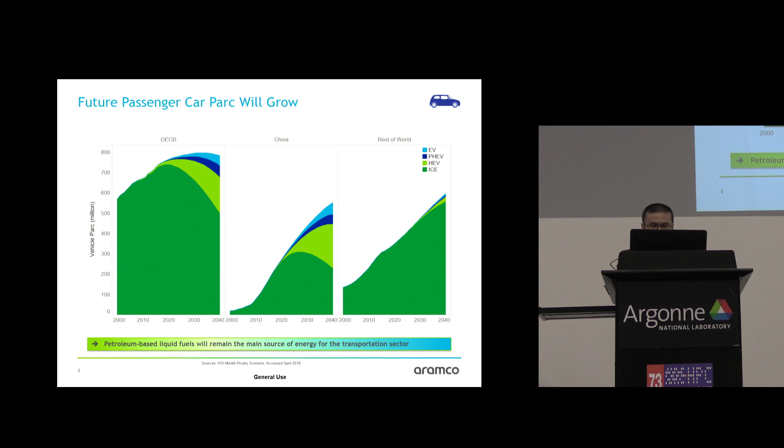Okay, then let's go to my presentation.

So this work has a lot of people, this is a truly team effort. A lot of people contributing to this work. I want to acknowledge a few people at our center, Aramco, and also our collaborator at Argonne National Lab, mainly from Sibendu Som's group: Pinaki Pal, Opeoluwa Owoyele, and Sibendu Som.

And also we have a collaborator from Friendship Systems. They mainly have a very capable software to help us properly manage the design space. We also have Dan Probst, Kelly Senecal, Eric Pomraning, Keith Richards from Convergent Science. They have a CFD software, commercial software, I'll give a little information on why we're using it. And also the Advanced Engineering System Integrity team from Cummins for their technical inputs.

So this talk is about using HPC. We use Mira extensively. Actually, now it's become a standard process in our daily job. We also acknowledge the IT department at Aramco Service Company for their technical support of the cluster.

So I want to spend a few slides to give you an idea of who Aramco is. We were the largest oil exporter and the 6th largest refiner in the world, with some recent purchases in the refinery industry. We also have a large reserve of natural gas, which is probably of some interest in the future.

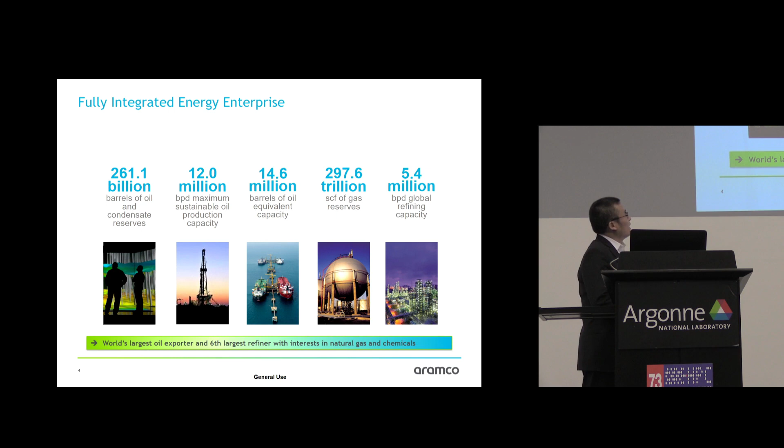So we have a lot of research activity, including upstream, downstream, and also strategic domain. I'm probably not going into too much detail on upstream. I mainly focus on where the Detroit Research Center is, which is in this strategic domain.

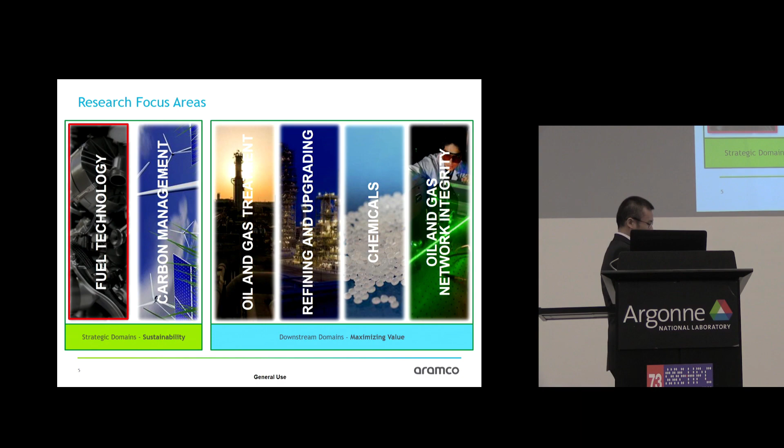Basically, we have a fuel technology division looking at how to use energy in a more sustainable way. The way we try to achieve our mission and goal is we work collaboratively with the relevant stakeholders. We have the headquarters at Dhahran, and we also have 3 research centers around the globe.

One in Detroit, one in Paris, and we also recently opened one in Beijing, and we also have one at KAUST. Then we work collaboratively with universities, national labs, policymakers, and OEMs especially, working closely with automotive OEMs to achieve the mission of how to use energy in a sustainable way.

So a little more information on our Detroit Center. We focus on 4 areas there: doing some strategic analysis of a future perspective of transportation, looking at advanced technology in the passenger transport sector, and also doing commercial transport research to look at co-optimization of fuel and engine to achieve optimum performance and lower emissions.

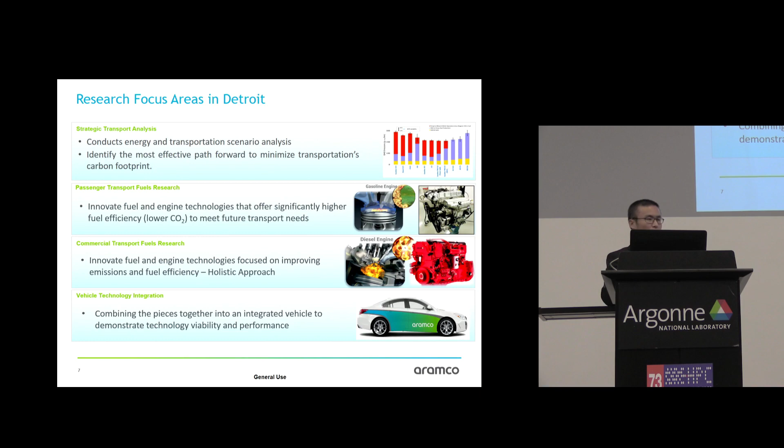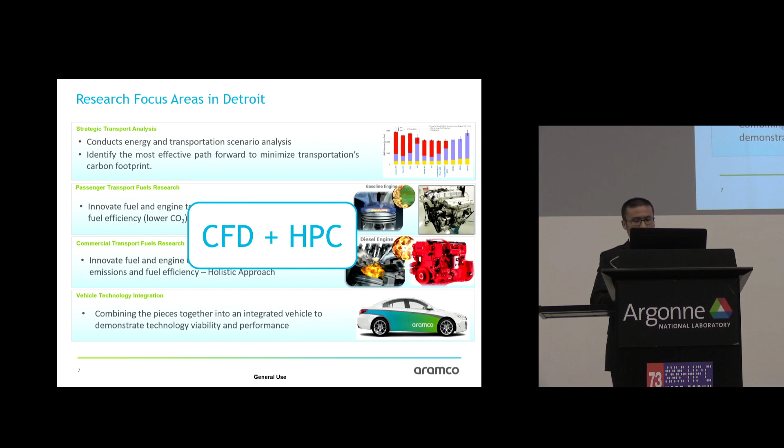And we also have this technology integration research there. The CFD and HPC mainly fall into the two in the middle. Our team is supporting passenger and commercial transport, looking for really advanced engine concepts that can achieve low greenhouse gas emissions and also low fuel consumption, achieving good fuel efficiency. That's basically our goal.

So our center is quite new. It was inaugurated at the end of 2015, still less than 4 years old. Very briefly, we have 5 state-of-the-art test cells to demonstrate the hardware and performance, and we also have a 4-wheel climate chassis dyno to put the technology in the engine to demonstrate the concept. We also have our own controller, which is really important, because control is a really important piece of this new engine concept. And we also have excellent computing capability there, especially working with the experts at Argonne.

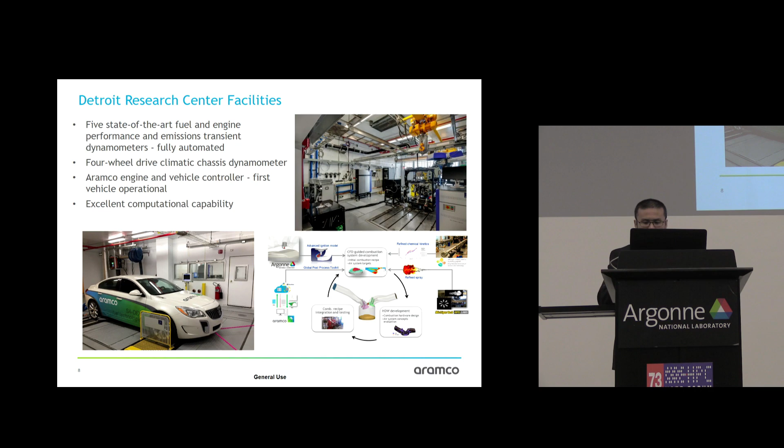So going to the project, I want to give you a little background on why we're working on this project. This is a project in the commercial transport area.

The reason we are working on this: this figure basically shows a fuel demand ratio in the next 30 years, a ratio of middle distillate, which you can consider diesel versus gasoline fuel. We can see by 2040, this fuel ratio might reach 1.7 from different projections. So this demand imbalance is likely to produce a price imbalance between these two fuels.

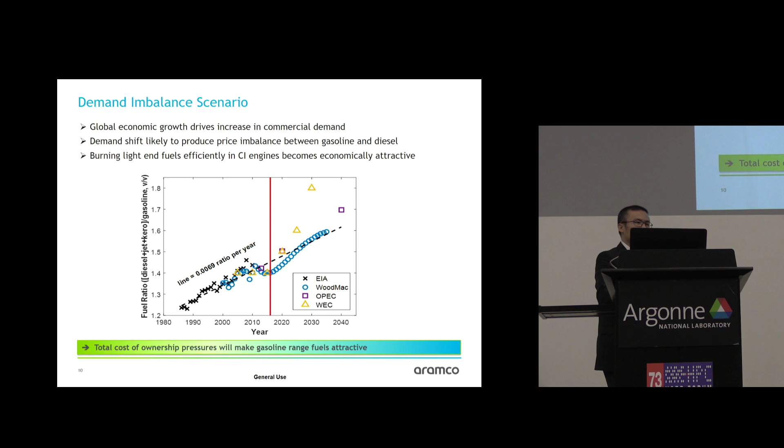So if gasoline becomes cheaper, how should we deal with it? Finding ways to burn this gasoline fuel in a CI engine, like a diesel compression ignition engine, becomes very economically attractive.

On the other hand, there's also a regulatory requirement, mainly from the emission side, the criteria pollutant side. CARB, the California Air Resources Board, is the world leader in making emission regulations, and the rest of the world usually follows that regulation. If you look at their footprint for the next phase emission regulation, just look at the NOx emission here.

Right now we are at 0.27 grams per kilowatt hour. We haven't finalized these details, but in less than 8 years down the road, it's going to reduce by one order of magnitude on the NOx emission. That's really a challenge.

You also can't keep increasing the cost to meet this target in a cost-effective manner. You have to find ways to economically and reasonably meet this emission target, and also improve fuel efficiency. That's why we're working in this area. Bringing gasoline into compression ignition seems like a good way to achieve this goal, so that's why we're looking at this.

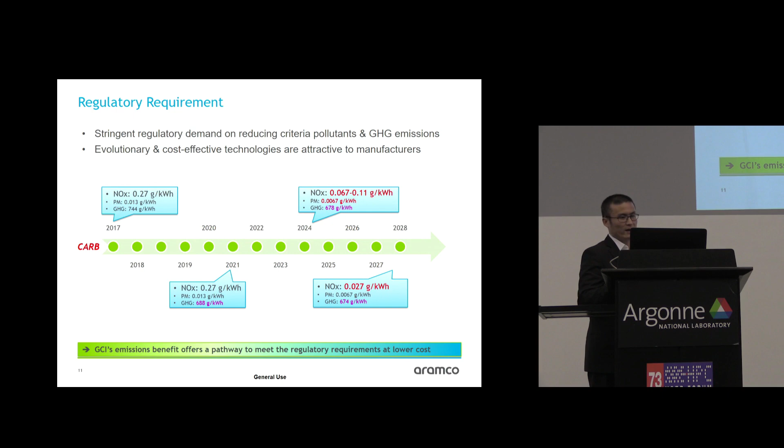The test engine we use is a Cummins engine. It's a very modern, very efficient engine. In the US, probably 1 in 5 or 1 in 3 trucks running on the freeway are using this engine. The one message to keep in mind is that it's a really efficient engine, about 44% brake thermal efficiency. That means even a 1% improvement on fuel consumption based on this engine is really challenging. That's one message I want to keep in mind.

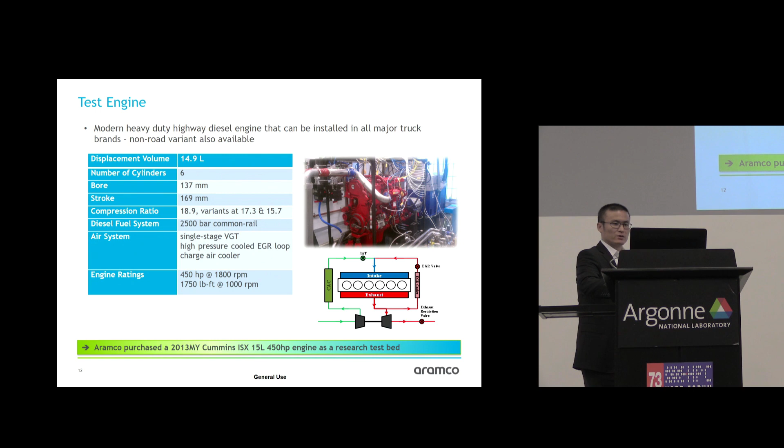We also look at different fuel options. Some of you may know about DOE's co-optima program. This is basically similar: we try to co-optimize engines, the hardware, and also the fuels to achieve the optimum, to see what's the potential there.

We have quite a few fuels here: diesel, the traditional market fuel used in engines, and also different gasoline fuels. They all have different physical and chemical properties, so you have to tailor the design to match those properties of different fuels to achieve the optimum. That presents the opportunity, but you have so many combinations, so many dimensions, you need to find the optimum combination. That's why we're using the supercomputer to help us deliver the project.

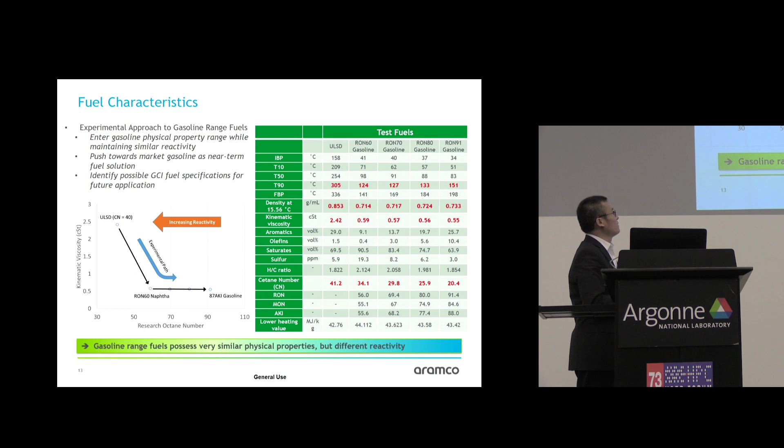So how do we achieve this? We use an analysis-led design process. This is a very brief overview: in the first part, we use a CFD-guided design process, which gives us an initial combustion recipe. Then we put the initial idea into the hardware development phase, get the hardware, and finally put it in the engine dyno for integration and testing. Then we get the results, and feed them back into the first part.

This is the iterative process, right? Then we will check what we're still missing, which part we can still improve. Then in this process, we keep refining our model. That's very, very important, right? So we work with KAUST. They're really good at this chemical kinetic part.

Then we also work with Michigan Tech. They run some really high fidelity spray, help us to calculate spray, then help us to refine. We're going to further refine our spray models as well. We also work with the Argonne team. That potentially will be a spark plug engine in the future, so we definitely need a really high fidelity capable ignition model as well.

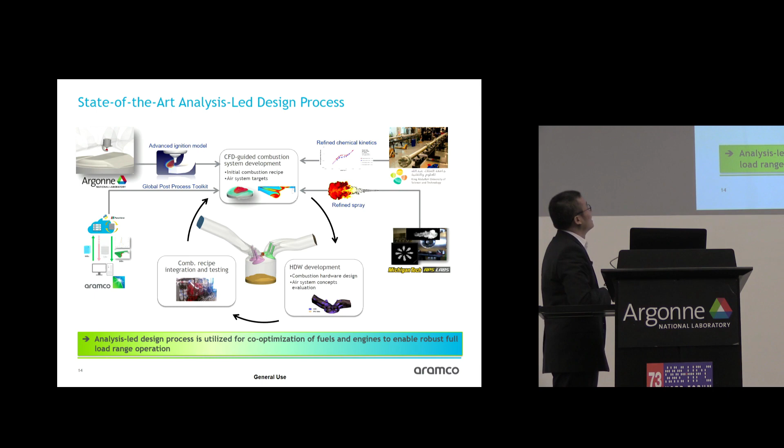Because the simulation runs on a supercomputer, there's massive simulations there. So we need a very advanced post-process tool to handle all these post-process parts as well. So basically we have this state-of-art analysis design process. It's really important. We need this process in place to enable full load range operation, not just look at one operating condition, right? It has to be robust full load range operation.

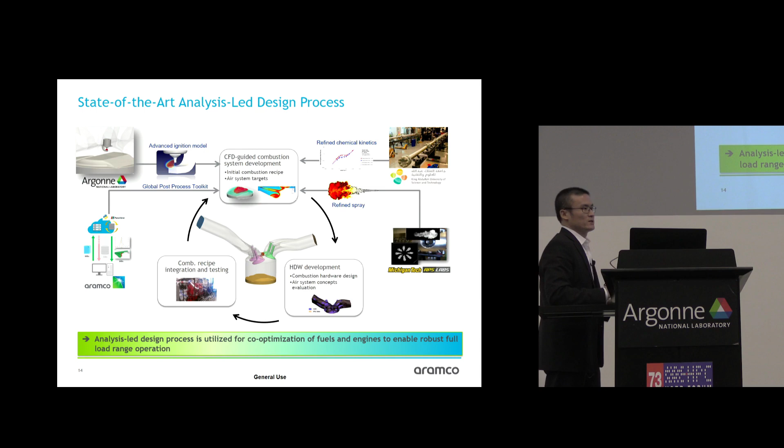Then we zoom in a little bit to the first bullet point there, the box, this CFD guided engine design analysis process. That's how we work here. This highlights the whole process. In the first part, we need to properly define the design space. That's very important. Sometimes the simulation is enough to define this design space. Sometimes you really need to work closely with experiments to screen and narrow down the range, then properly define this design space. I'll give you more details later.

So we use CAESES, this software. It's really capable. The reason we choose them is you can see this is a piston. We cut it right in the middle, so it's really capable to handle all different variations of this design. This is just one example. In the top, this is the injector. This is a very important piece in the engine, and we also need to optimize it. So right now we rely on this CAESES software to significantly improve our productivity in handling the design space.

Then when we have all the designs, like 100 design combinations, we'll be using Mira at Argonne to run this simulation. It's really efficient. I also have to give lots of credit to the Argonne collaborators, David and also Sven, and also Convergent Science. They spent years of research trying to improve the code scalability, I/O performance, memory utilization, load balancing. There's a lot of hard work there to really make this a robust process, to run all these simulations in a capacity fashion on the supercomputer.

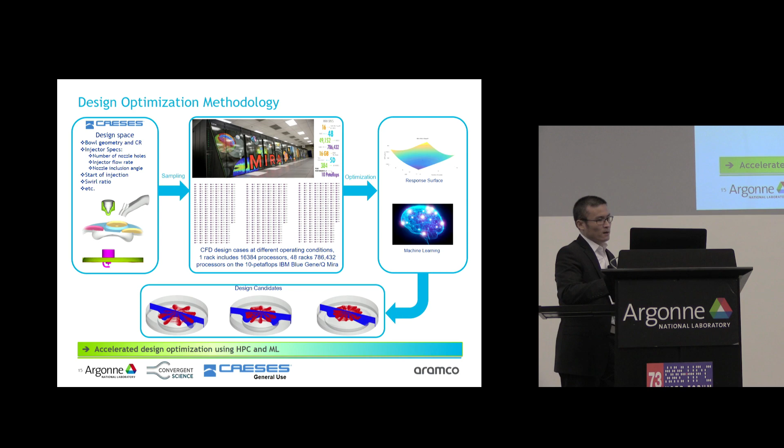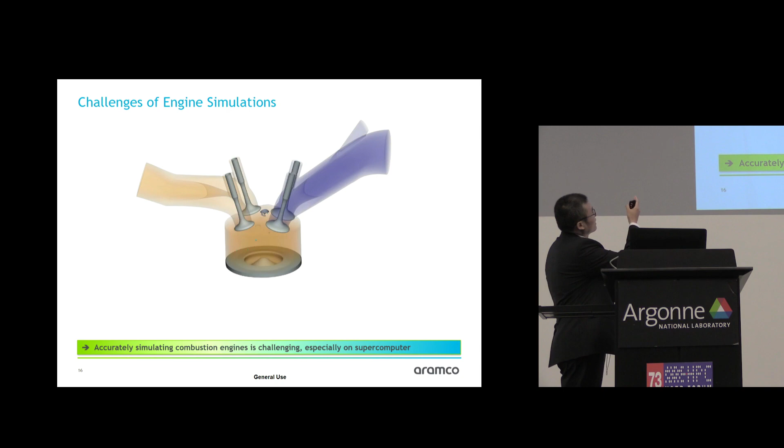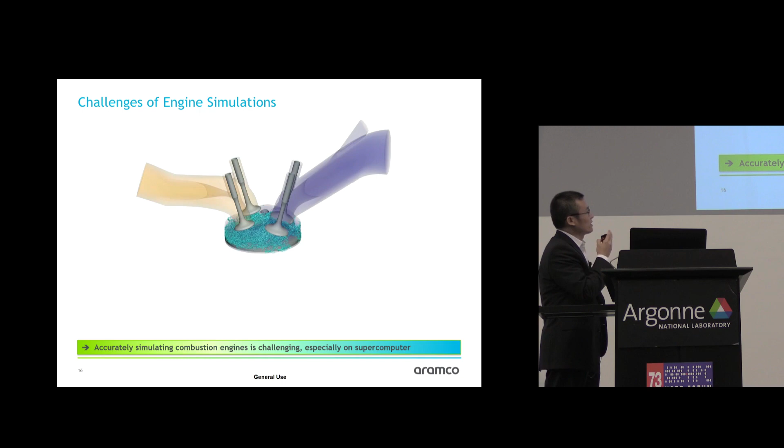Before that, I also want to give some more information here. Probably not all of you know what engine simulation looks like. I want to emphasize some challenges when we do this engine simulation. First, when you look at this engine simulation, there are moving parts. It's a highly transient process. You have the piston moving, the valves opening and closing, and the fuel spray injecting into the cylinder at really high speed. This is really high transient turbulence, also including combustion and emissions. It's a really complicated simulation.

To give you an idea, the injector nozzle diameter is about 100 microns in length scale, but the cylinder diameter is on a 100 millimeter length scale. So there's a large disparity of length and time scales you need to handle for this engine simulation.

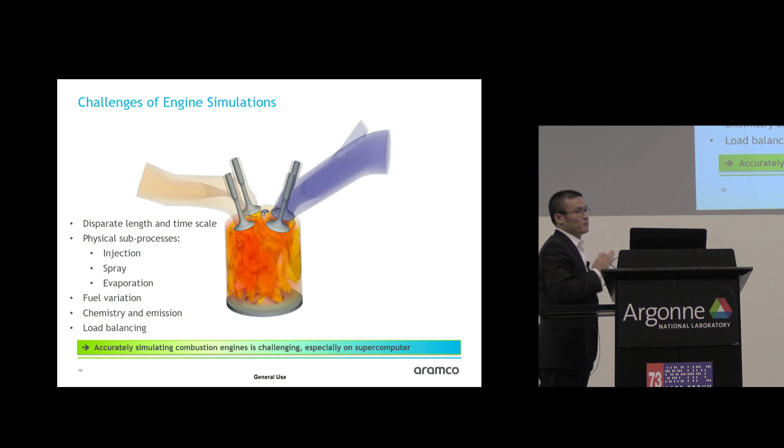That's also a very complicated physical sub-process, right? You have the fuel injection, you have the spray, you have the evaporation. Just to give you an idea, even just for spray, this is a kind of a schematic of a spray from one plume. Then you need to consider how you inject the spray into the cylinder, how the spray breaks up, coalesces and collides, how it goes into the vapor phase, how it interacts with the turbulence, what the chemical kinetics looks like, and finally the emission. There's a lot of details here.

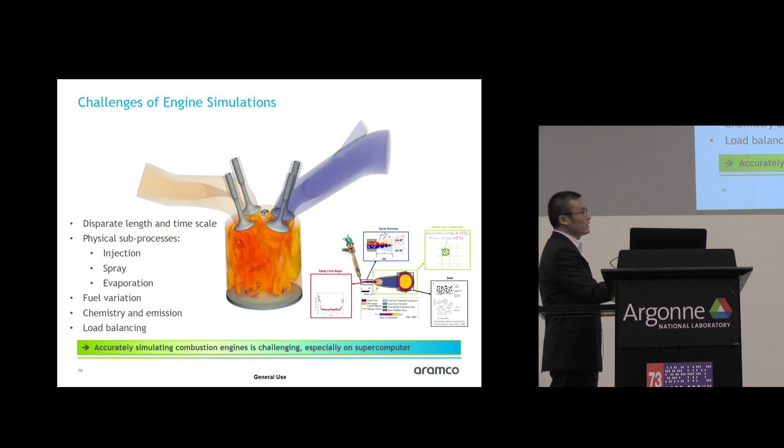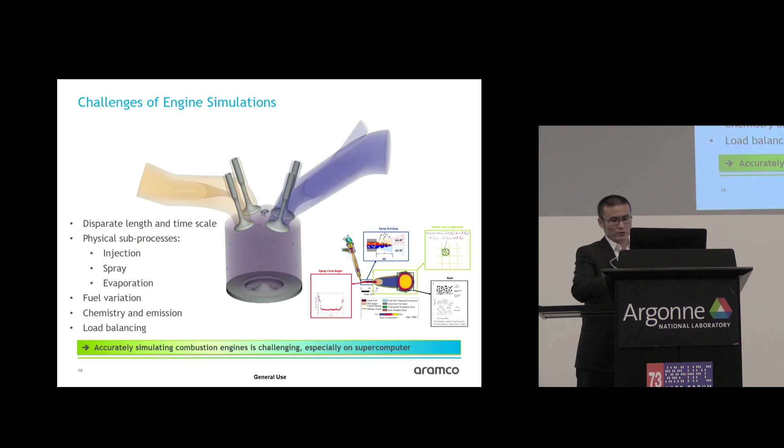And also, because we're doing the fuel engine co-optimization, we also need to consider the fuel variation as well. And associated with it, you have the chemistry there. There's a lot of details in chemistry, and also emissions. And finally, there's also load balancing. So why I want to show the load balancing here is, in this slide, the code we are using is called Converge. It's a commercial code. Probably many of you are using open source code, and you might ask why we're using a commercial code here.

So the reason really is that in the automotive industry, most of the OEMs right now are using commercial code. And I would say Converge dominates the automotive industry. So for Aramco, we want to work with OEMs, so we're using Converge. And another important reason is it's really powerful software. The part we like the most is this very advanced, innovative AMR, adaptive mesh refinement.

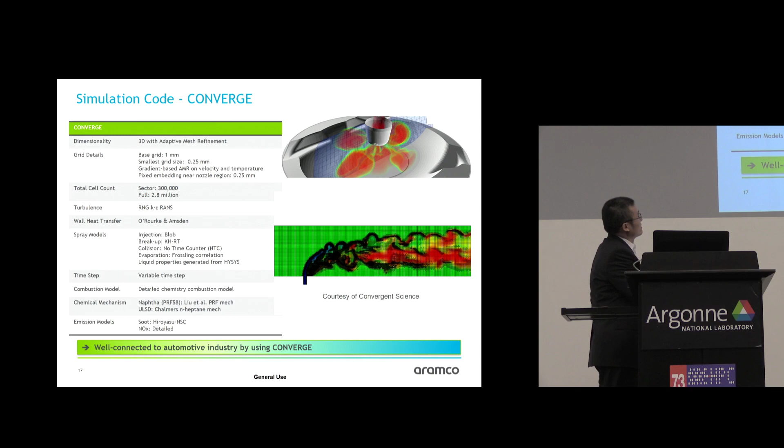That's really important. Like I mentioned in the last slides, you have a huge domain. You don't want to have a uniform mesh across the domain. We cannot afford it, we have so many simulations. So you have to only refine the region that's of interest, and leave the other regions relatively coarse. Then you can better handle the computation time. So this is a jet in cross flow here. You can see how it deals with the mesh, basically updating the mesh refinement in every time step. It's a very advanced software, so we really like it.

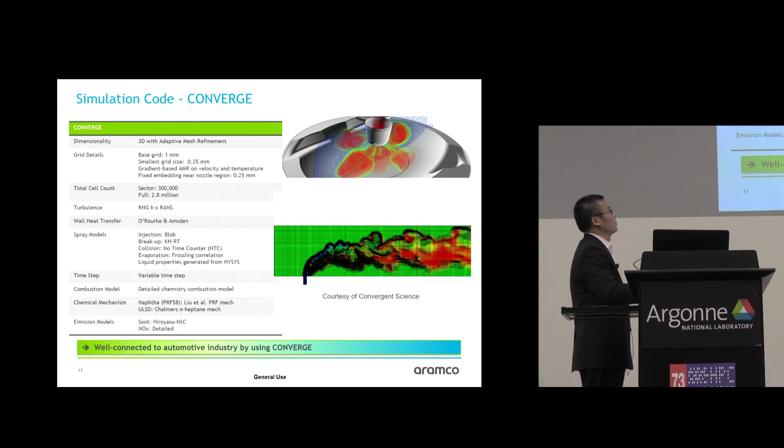This lists all the sub-models we're using. There's a lot of things you need to improve for sure. That's why we work with the national labs and universities to try to improve some sub-models. Okay, let's go to the final application. So with the background in place, we did this co-optimization of fuel and engines, and we have a couple of applications. The first one is this mixing-controlled combustion mode, targeting the near term. We want to see the fuel consumption improvement potential if we're meeting the current emission regulation. The second part is low temperature combustion mode, for like 7-8 years down the road, when we have to meet the low emission standard. What's the potential there?

Okay, let's first look at the first application. So that's what we got following this HPC-based engine design optimization method, from the simulation. This basically shows the fuel consumption improvement for one design. This is kind of a combination. We can get like a 4.1% improvement in fuel consumption. That's from the prediction. This shows the different parts, breaking down which part contributes how much to the fuel consumption improvement.

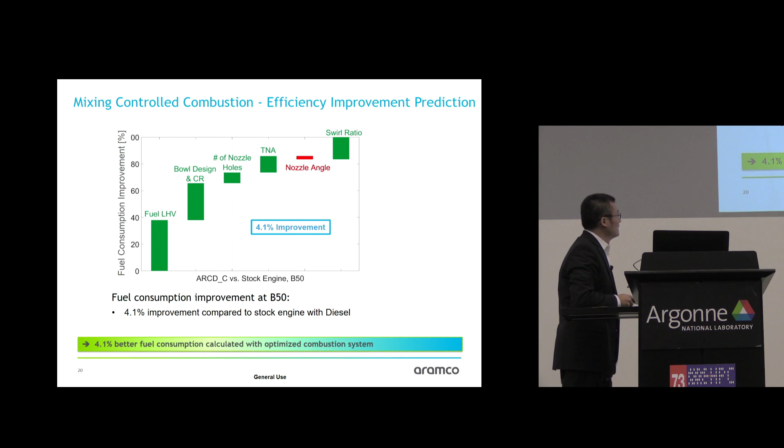Then we deliver, we do the hardware fabrication, put the hardware in the engine and do the testing. That's what we got. With different combinations, we can achieve anywhere from 3.2 to 4.2% improvement. So basically, we can achieve up to 4.2% fuel consumption improvement. There's a couple of messages here. First, they seem to be on the same order of magnitude as the prediction. That's really encouraging. But we definitely need to look in detail to see what we are doing well and what we are missing, to further improve.

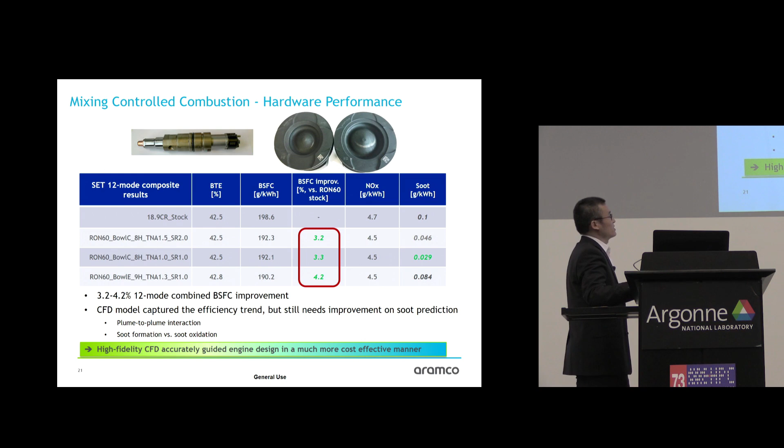So that's one message. The second message really is this high fidelity CFD simulation is accurately guiding us to do the engine design to achieve our goal and meet our timeline to deliver the design and the project. And this is in a much more cost-effective way. You don't want to test all the hardware combinations in hardware, that's too expensive. So that's really encouraging when we see this. Then how about the second one, for the future low emission standard?

So for this one, it's more challenging. The reason is the design space I mentioned in the previous slide. The design space has to be carefully characterized. You cannot just rely on simulation. You have to work closely with experiments to properly design this design space, because we have so many fuel combinations here, so many fuels here.

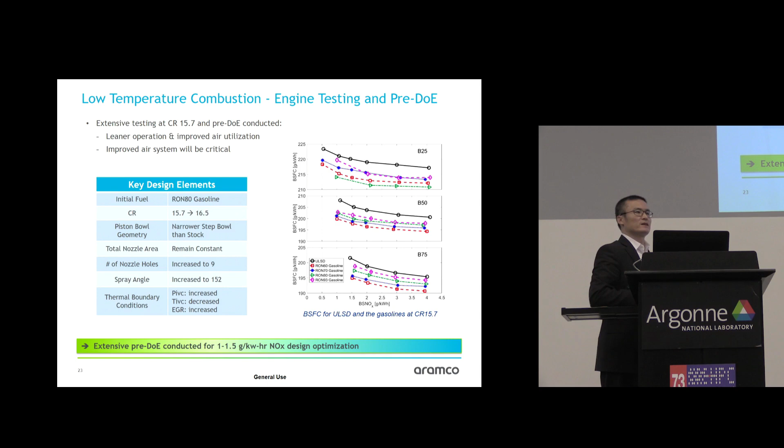We want to see which fuel gave something promising, then help us shrink down the design space a little bit. So with a lot of work to help us properly define the design space, this is finally what we got. We got up to 6.3% fuel efficiency prediction.

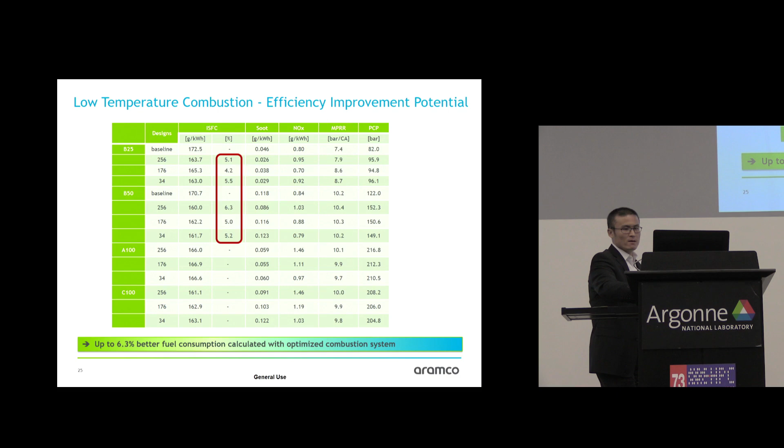That's our prediction. Right now we already got part of the hardware. We're still waiting for one or two pieces of hardware coming in. Then next month we plan to do our integration testing. Hopefully we can finish the story for this part as well. So that's how we use HPC to guide the design process and help us deliver the project.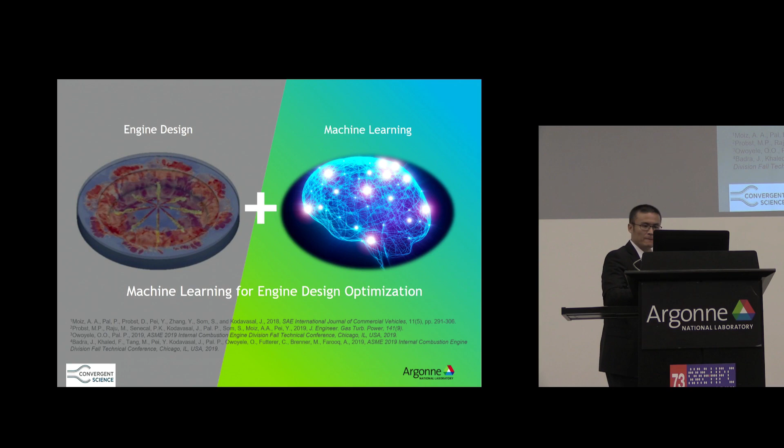So what if we take a step further to see how machine learning can help us here? We work with Argonne's group, with computer science as well, to give it a shot and see what's the potential, what's the possibility there. So there's this new method called the machine learning genetic algorithm method for engine design.

The motivation for us is we did a design which used a traditional genetic algorithm method for the engine design. We tried it out. Along the process we found it's a nice method, but it needs a lot of generations to converge to an optimum design. It's a very lengthy process. And when you consider the real application, you have so many operating conditions. Combining all these operating conditions makes the process even longer. That's something we cannot afford.

So that motivated us to look at whether we can leverage high performance computing, or a supercomputer, to further reduce the design time. That's why this method was proposed. We basically use a supercomputer to run a bunch of simulations. For this first project, we ran 2,000 simulations as training data for the machine learning.

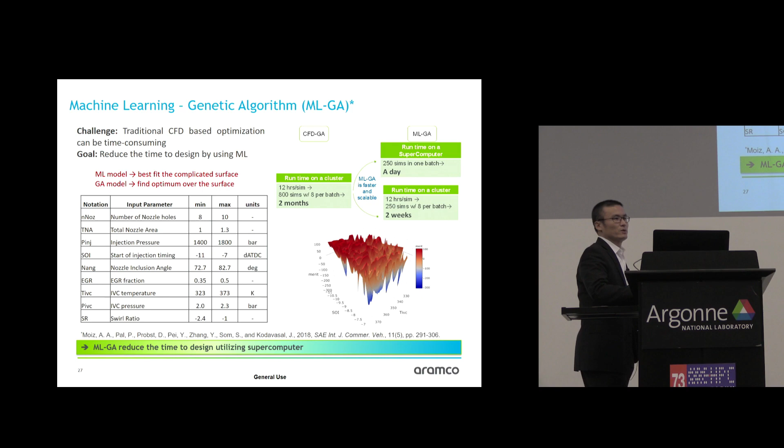If you run these simulations on a cluster, it takes too long, like a month, maybe half a year. But running on a supercomputer you can achieve it in a couple of weeks and finish all the simulations. Then we used these 2,000 simulations as a large data set for machine learning training, and we found that with 9 design variables, probably 250 is sufficient to do the training.

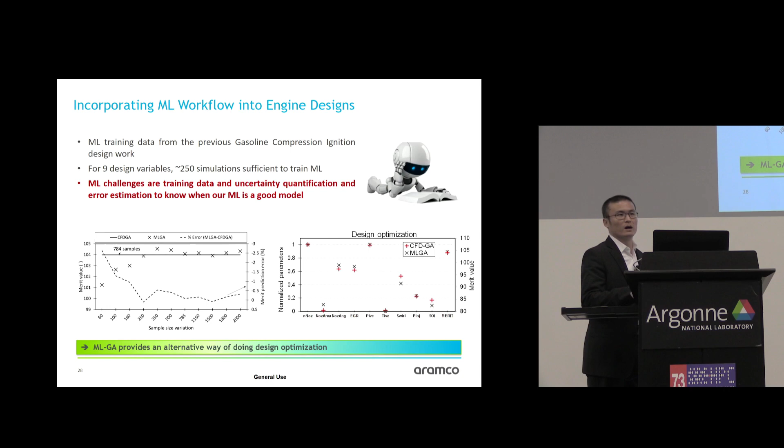Then we compared it to the traditional CFD GA method. We found pretty decent, very good results. And it can help us really significantly reduce the design time. That provides another way of looking at engine design, using machine learning.

Then we also extended it a little bit. In the previous project we looked at different design parameters like boundary conditions. But here we asked, can we also do the bowl geometry as well? We used a similar methodology, and it gives a very similar prediction to the traditional CFD method. So it's really encouraging, not just for boundary conditions but also geometry. We definitely see the potential here.

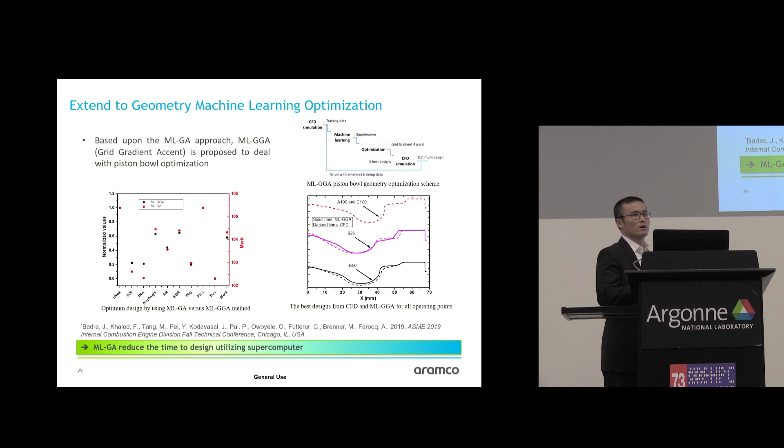Machine learning can further reduce the time to design, but like I said, most of the automotive industry is very conservative. They need time and more evidence to prove they can use this method. For us at Aramco, we are a little bit more progressive, but we also have a timeline. We will probably do a couple more demonstrations to prove it is solid and robust and can work. Then we can apply machine learning into our design process.

Finally, a summary. For this project, we have a comprehensive engine design: we have the hardware, did the testing, and showed the fuel consumption improvement. Although 4% doesn't look like a big number, you have to consider this is a modern, really efficient engine. For a normal gasoline car you are driving, the BTE, brake thermal efficiency, is probably around 30% or slightly over.

For this Cummins engine, it's like 44%, really efficient. Any improvement upon that is actually significant. So we see 4% as a really significant, encouraging result. And we also see this accelerated design process using HPC.

Right now, actually, it's become our standard design process at our research center, because we work closely with a wide range of OEMs. So for us, we really don't want to keep it confidential. We're going to share with the whole automotive industry; if they are interested, they can use the methodology.

We also see the potential of machine learning. I think we are a little bit aggressive, not that conservative, because we probably want to do a couple more demonstrative projects to see if it's solid and can be utilized in the industry.

For future work, we're going to further streamline this whole HPC-based engine design process. For example, one idea is using Swift as a resource manager to streamline the whole process, to make it more user-friendly for this design process. And like I said, we're also interested in integrating machine learning into our design process.